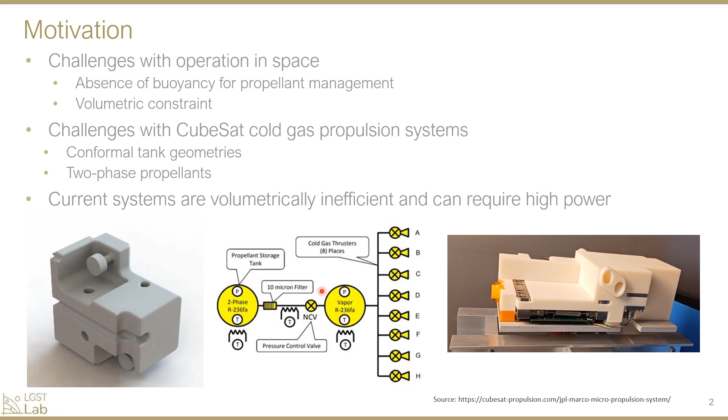Simultaneously, if we were to eliminate this time delay component to our plenum tank, we need to introduce an inline heater, which would vaporize the liquid propellant on the way to the plenum tank. This process, however, introduces additional power constraints. So it is obvious that with our current system, there's a need for a more volumetrically efficient as well as power efficient system that can maximize our efficiency.

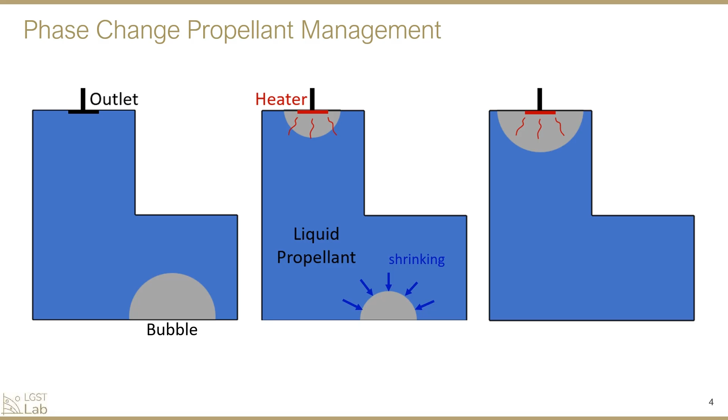With our experiment being a microgravity application at the end, it is obviously important that we try to launch this in a microgravity experiment and see how our system performs. In this case, our team in our lab is really lucky in that we were selected by NASA TechFlights to be on board the Zero G Corporation's parabolic flight, in which we have 4 separate opportunities to test our experiment. Essentially, a parabolic flight is a plane that follows a parabolic trajectory that gives you 15 to 20 seconds of low to microgravity conditions, depending on the flight conditions.

The one major benefit a parabolic plane provides is that we, as experimenters, can directly interact with our payload, which would, first of all, simplify our designs, as well as allow for more complex designs to be incorporated. Now, let's talk about our experiment VAPOR, which stands for Vaporization for PrOpellant Repositioning.

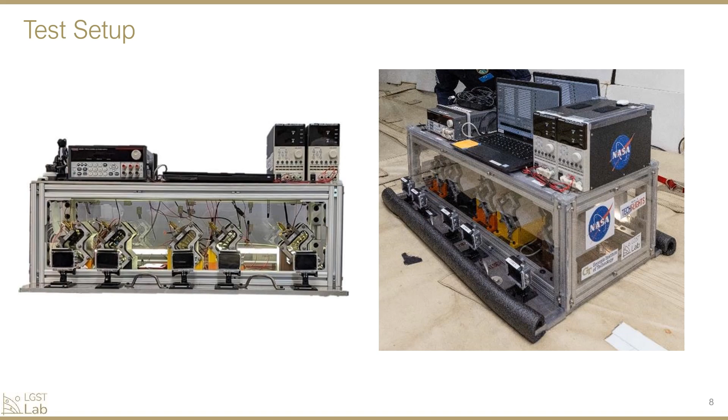As I've mentioned earlier, we have 5 tanks with different heating mechanisms. First of all, one of the tanks incorporates a patch heater, which makes sense as it is a continuation of our previous ground test in microgravity settings. The remaining 4 tanks incorporate a cartridge heater style. Essentially, a cartridge heater refers to a hollowed out aluminum bolt in which we slot in thermal-resistive cartridge heaters. 3 of the cartridge heaters incorporate a PMD, whose functionalities we'll explain momentarily.

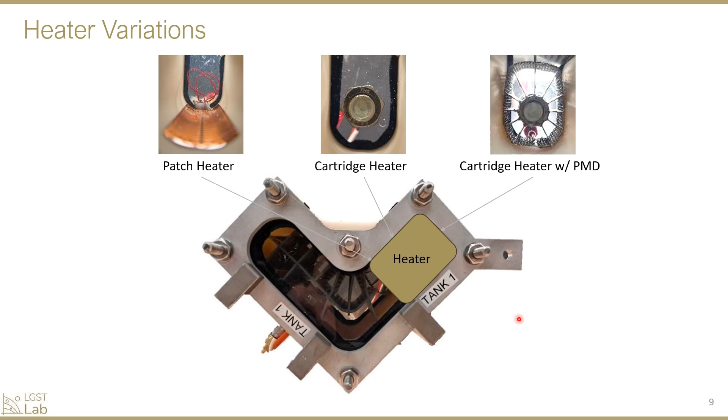For each of the tanks, we incorporate a baffle design within, which allows us to minimize the effects caused by sloshing of the liquid itself, which then minimizes the effects it has on the dynamics of our investigation. As mentioned previously, 3 of our cartridge heaters feature a capillary PMD design. The reason for this PMD has 2 components. First is to increase the vaporization rate efficiency. Second, once we generate the vaporized propellant, we want a mechanism that can hold it in place so that we can extract it at a known location to generate thrust.

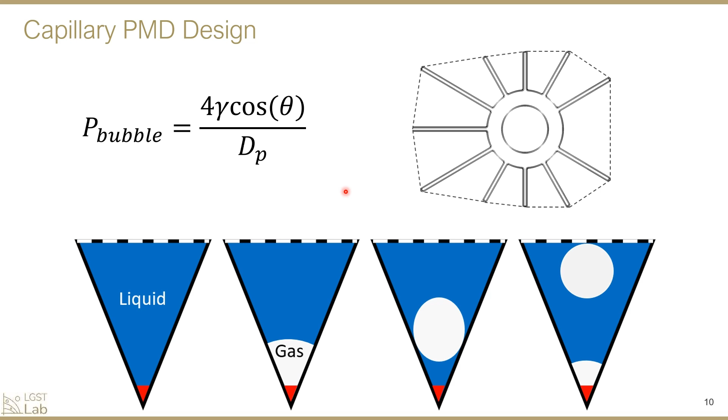The way it works is that as we submerge the capillary mesh within the bulk liquid, the mesh is wetted and generates a surface tension effect that prevents the penetration of gas bubbles through the gaps. The pressure required for a bubble to go through this mesh can be characterized using this equation, which is known as the bubble point pressure. So we've talked about the different components of our experiment. Now let's talk about the overview of our experiment.

During this experiment, which lasts approximately 15 to 20 seconds, first of all, we're going to record the visual data of our tanks, in which we can capture the interface and also the bubble dynamics. Second, 3 of the tanks are sensorized, so we can capture the tank pressure as well as temperature at different locations.

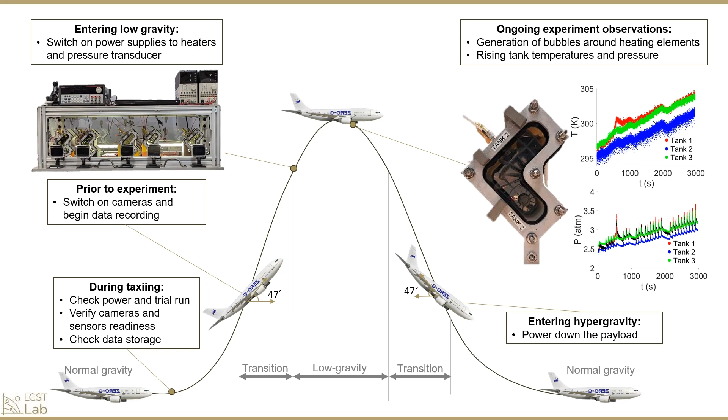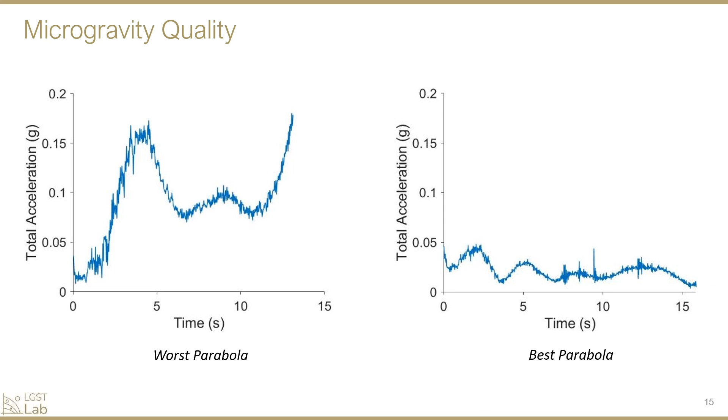With this being a microgravity experiment, it is going to be important that we talk about the microgravity quality that we're able to get. First of all, I'd like to point out that all the y-axes observed here are going to be in the order of g's. So the worst parabola that we've had during the day, during the experiment, is going to be on the average of 0.15 g, in which a decent amount of fluctuation is observed. And during our best parabola, which is parabola 6, we have observed an average of 0.03 g, which was ideal.

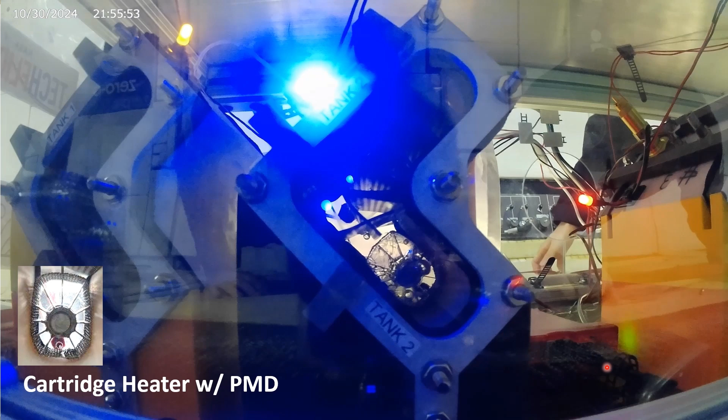Now, I would like to talk about our experimental results. First of all, it's going to be a depiction of our cartridge heater with PMD. As I would like to point out, prior to the activation of the heater, which is before the LED light, you can actually notice that there are going to be bubbles located at different locations around the capillary wedge, indicating the effectiveness of our PMD.

It is also important that we point out that despite the effectiveness of our PMD in terms of capturing bubbles generated from the previous parabolas, there's going to be a detachment of those windows, essentially. This is caused by a material incompatibility issue that we have with the plexiglass that we've used. Turns out it's not really compatible with refrigerants, which we've not been able to test previously, but this is going to be addressed going forward.

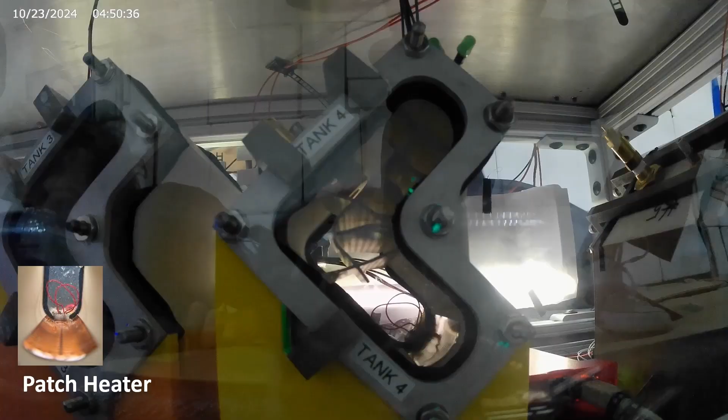Now moving on to the patch heater, you can observe that the patch heater actually has a very high rate of vaporization. This is mainly due to the acceleration profile of the plane, in which the contact area between the patch heater and the bulk of the propellant is going to be with the liquid propellant, as opposed to ground testing, in which, as the propellant is more and more vaporized, the wetted area is reduced. However, that is not observed in the flight test.

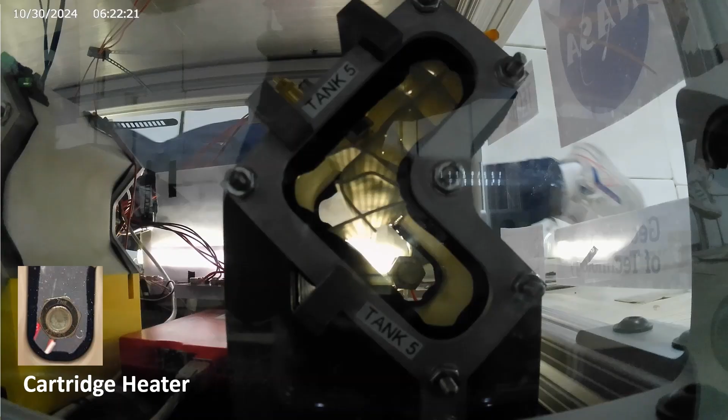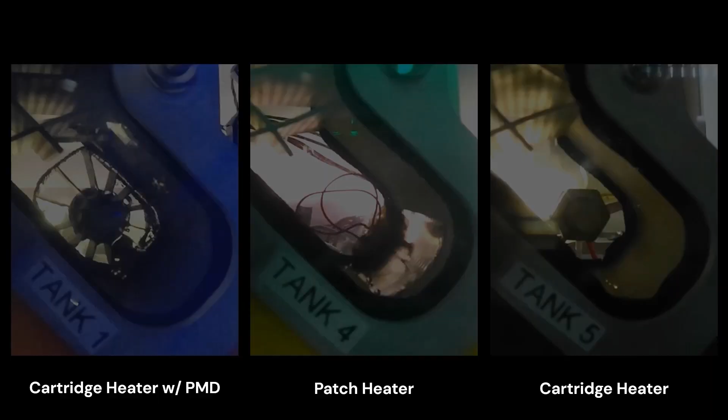Lastly, I would like to discuss the results observed by the cartridge heaters. As you can see, this cartridge heater, which is without the PMD installed, has a higher vaporization rate than that of the PMD. This could be further explained if we were to do a side-by-side comparison of all three configurations.

First of all, we would like to point out that the patch heater has the highest rate of vaporization. As mentioned earlier, this is mainly due to the acceleration profile of the plane. The vaporization rate is followed by that with just cartridge heaters, and lastly, the cartridge heater with PMD. This actually indicates the presence of an additional thermal mass or thermal inertia added by our PMD, which delays the onset and cessation of bubble generation in the system.

Overall, to conclude our experimental findings, it is important that we point out, first of all, we've been able to prove that both cartridge heaters and patch heaters were effective in terms of vaporizing our propellant. It is also pointed out from our experimental results that PMDs are necessary, and in this case, as shown with the PMD installed on the cartridge heaters, it was effective in terms of retaining all the bubbles generated in previous parabolas.

However, it is important that we acknowledge that there are going to be impacts caused by the installation of PMDs. The first being the increased thermal inertia introduced by the PMD structure. This leads to a delayed onset and cessation of bubble generation in our system. And lastly, there's an observed reduced rate of vaporization when we have the PMD installed on our cartridge heater.

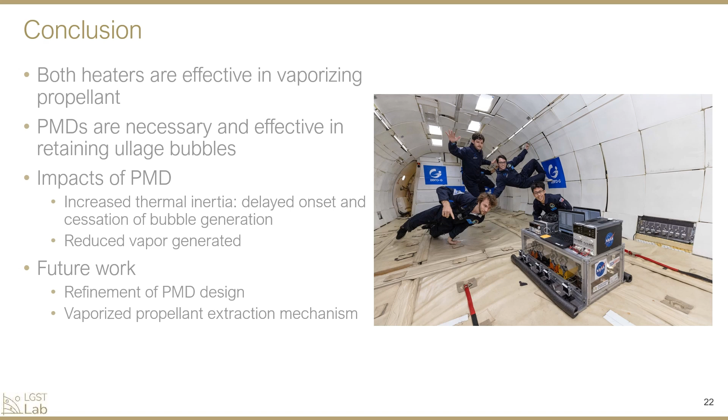This actually indicates a lot of potential future work we can do going forward. First of all, there's going to be some refinement in terms of our PMD design, particularly the material incompatibility issue that we've encountered. We're also looking into characterizing our thrust, as well as improving or developing a vaporized propellant extraction mechanism. But that is the end of our presentation.